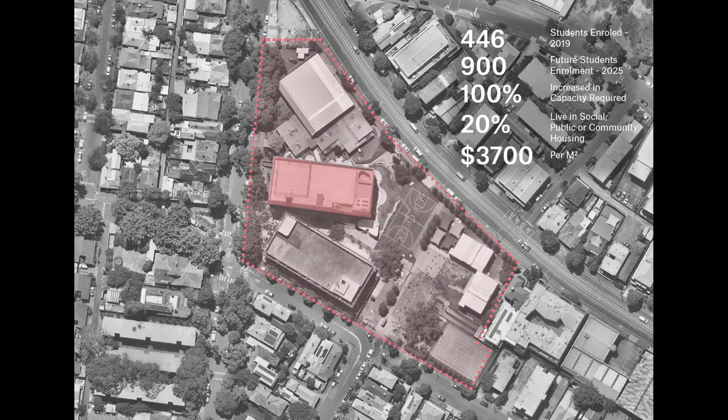Over the last 10 years, Mount Alexander has been transformed from a failing school into one of the fastest growing secondary schools in Melbourne, and the new building was desperately needed to support a projected enrolment of 900 by 2025. The original master plan that we developed for the site showed 2 separate buildings in line with the brief that the project needed to be delivered in 2 separately funded stages to be constructed at different times.

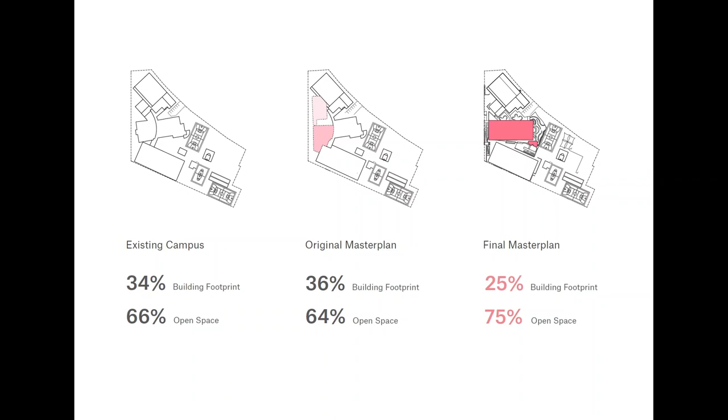When funding was provided to deliver both stages simultaneously, we took the opportunity to revisit the original master plan, and instead we proposed a single 5-storey building with a rooftop play space that would deliver significantly more usable outdoor space than the original site had, and also the original master plan proposal.

So the quality and the aspiration of the existing buildings within the surrounding suburban context provided cues as to how a beautifully articulated facade could generate a sense of pride and generosity. The permanency of these buildings reaffirmed for us the decision to commit to masonry, albeit precast concrete.

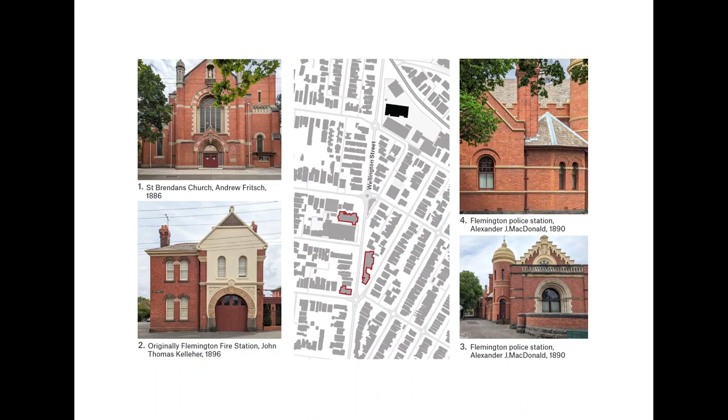Next to our building is a red brick heritage listed substation, which is of historic and architectural significance, as it's a typical remnant of the infrastructure built as part of the electrification of the northwestern suburbs. And yes, I guess we joke with the client, perhaps we should just scale this building up and be done with it. And in many ways, maybe we did, but the budget and site constraints did not allow the formal gymnastics. And so our focus was on the articulation of the facades, which are formed of precast concrete panels with a red oxide.

The intensity of the red facade continues internally through the circulation, amenities and breakout core of the building, which are all located centrally and to the south. Teaching and learning spaces are arranged primarily to the northern perimeter to gain the best solar aspect.

Extensive consultation with the school community, including students, staff and parents, suggested to us that given their level of high aspiration, the interior should feel more like a tertiary institution than a secondary school. An educational building that would offer multiple ways of occupation and learning, underpinned by a palette more sophisticated than their existing facilities.

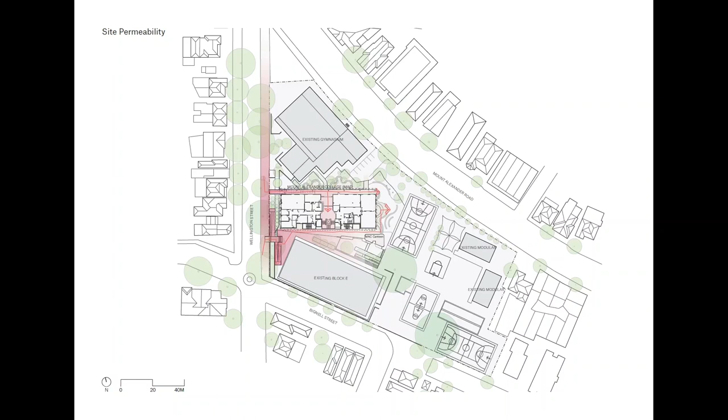So as well as maximising outdoor space, key campus strategies included a greater permeability and accessibility across the campus from Wellington Street to the left of that page, an activated ground floor with the introduction of an amphitheatre at the campus heart and externalised teaching and learning spaces, and the introduction of a campus plaza served by the externalised stair to the south of the building.

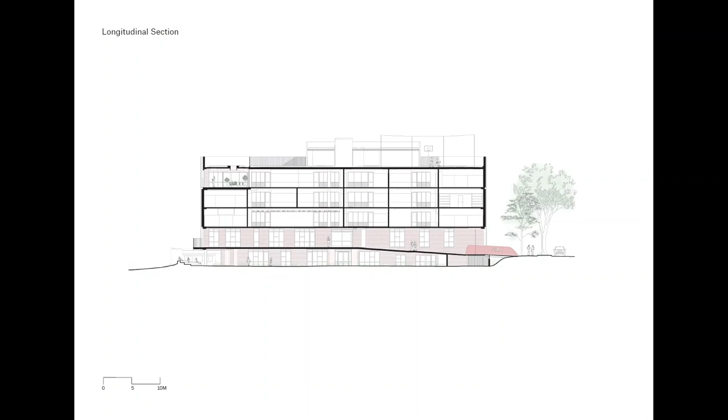Utilising the height differential between the new proposed school entry on Wellington Street allows for at-grade entry, whilst also allowing for significant connection to the landscape on the ground floor. The elevated nature of the site within Flemington also offered the potential to create a strong visual connection, not just to the surrounding suburban context, but also to the city beyond.

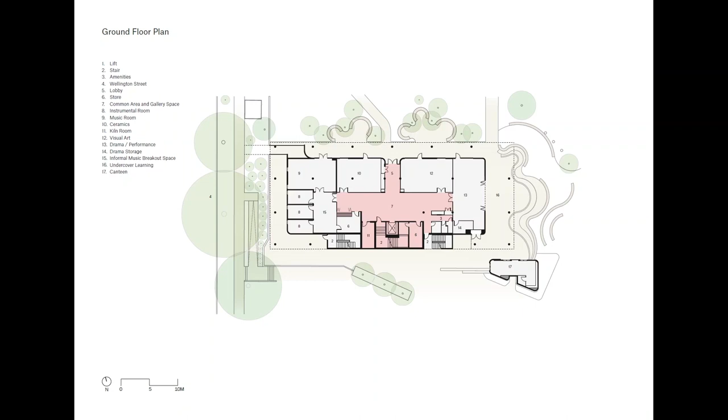Each of the floor plates is defined by a centralised circulation spine, with teaching and learning spaces arranged to enjoy maximum northern light. With amenities and stairs located to the south, the building's long axis is almost perfectly aligned to true north. The ground floor opens directly onto the campus and offers a performing arts hub opening to an amphitheatre and a student canteen.

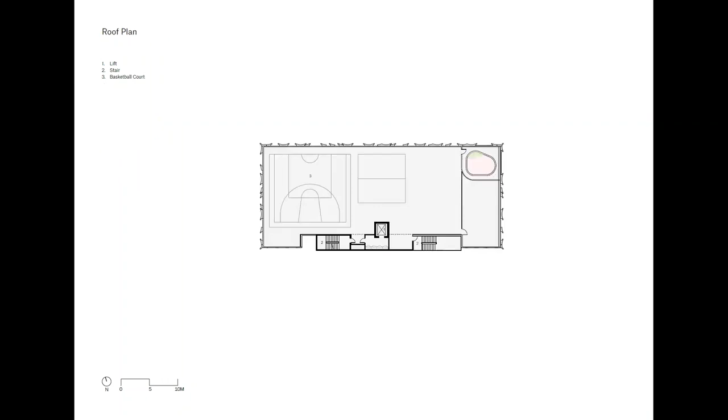The first floor is level with Wellington Street and includes a reception and staff work areas as well as flexible teaching and learning spaces. 2 floors above offer teaching and learning spaces that can be adapted to respond to an ever-evolving curriculum. And the rooftop offers additional play space and more than exceeds the footprint of the building itself.

Part of the regeneration and growth of MAC in recent years has been driven by a shift to student-led curriculum, which is not restricted by year level and changes based on student demand each year. This required an approach to planning that could support a continually evolving range of subjects and class sizes, which also opened up for us a much larger question as to the ability of the building to continue to evolve for decades to come. In our view, a fundamental requirement for a new building if it's to be considered truly sustainable.

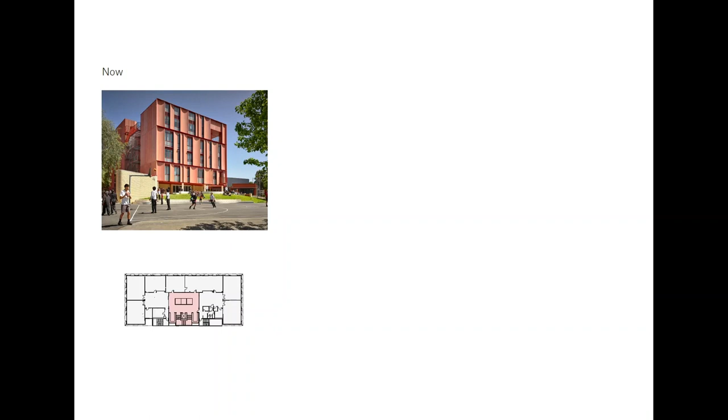Our practice has completed many projects which involved the refurbishment of buildings constructed 100 years or more ago. And whilst we were keen to support the immediate needs of the school, the ethics of demolishing an existing structure to make way for a new one was something we thought needed to be considered. The existing building that was demolished was of very poor quality and could not provide the area required by the school, so retaining it was not an option.

Whatever we built needed to be good enough to be retained and adapted well into the future. This was never just a new building for us, it's also a future adaptive reuse project, although almost certainly by architects other than us. MAC seeks to serve the immediate aspiration of its school community, which is incredibly high, without closing off future possibilities, including that it might not always be a school.

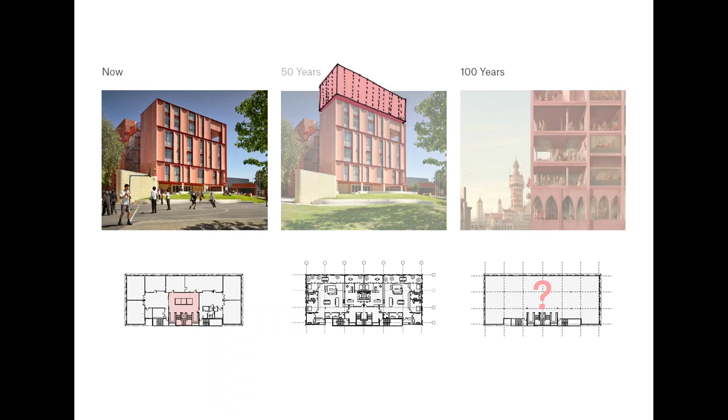The structure allows for infinite reconfiguration internally with a facade that regulates light while allowing for partitions to be created throughout, a continually varying window arrangement. Designing the floor plates and structure of MAC to support an evolving range of subjects and approaches to pedagogy has led us to believe that it can evolve for much longer than the required 50-year lifespan of the building, well into multiple futures.

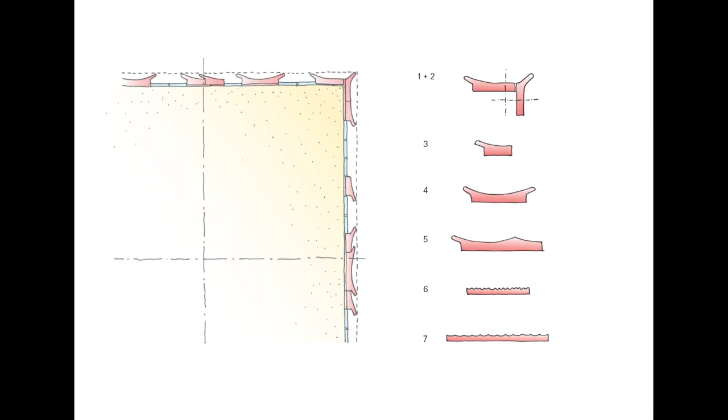The suburban context in MAC called for a considered approach to the facade that both assists to minimise the perceived scale of the 5-storey building, but also deal effectively with shading to 3 sides. The southern side is almost completely blank, with only one window. Precast concrete was selected due to its longevity, and the cost constraints meant that we needed to use just 7 different moulds that are deployed and rotated across the facade to provide optimum shading.

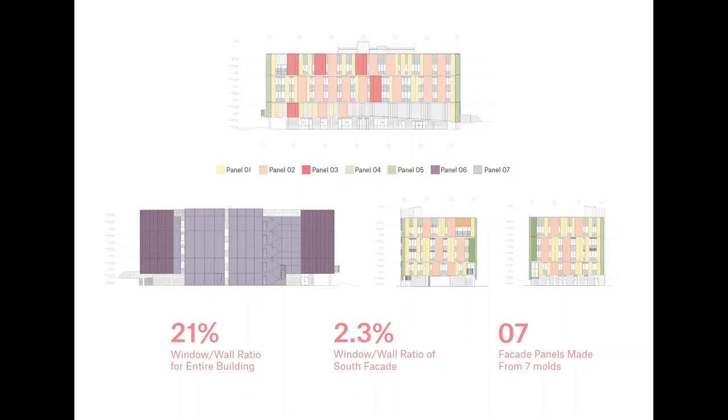In early discussions with the client, we spoke about the rationale and simplicity of a car park as a precedent. Whilst we certainly would not hope for it to be used as a car park in the future, we can envisage it become a different type of educational facility altogether, or even apartments, or something we can't even conceive of. The simplicity of the grid and rationality of the circulation leaves space for multiple possibilities.

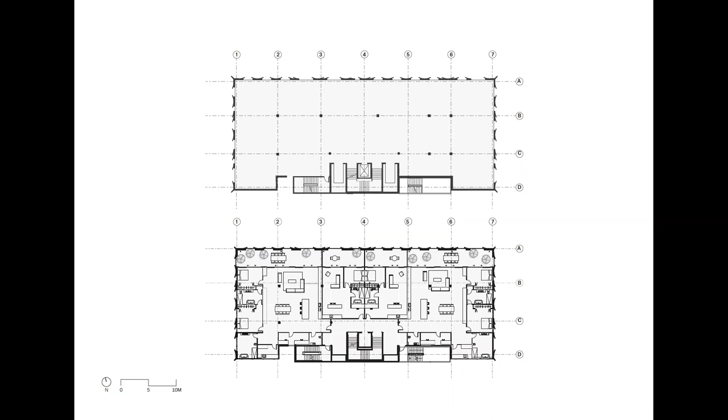The building aims to support not only the immediate aspirations of its students, it encourages everyone within it to continually lift their gaze to the wider world outside, and in doing so consider what the trajectory might be. This is what we mean by supporting the aspirations of the school community. We believe this connection to the broader context will remain not just relevant but essential, regardless of who those future inhabitants are, hopefully for decades to come, whatever uses this building may contain in the future.